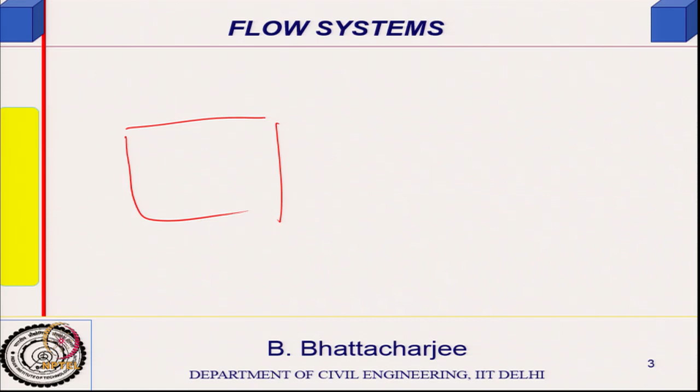As we have seen, if you recollect, I will just draw it again for you right now. We had some resource environment, then the service system, and then I have got the control environment, basically where I want to provide the service. Now, this has to be in a controlled manner.

For example, for air conditioning I have got temperature and relative humidity. Now, supposing it is in a tropical climate, and in summer I will be supplying cool air to the room, which will absorb the heat from the room and then exhaust out.

So, in such a situation this supply has to be controlled depending upon the situation here. I cannot go on just supplying and cooling it, because there is a range, a design range. So, I must get information from here and control this supply.

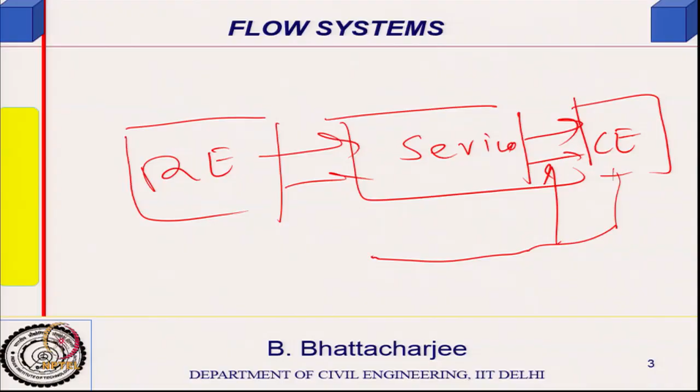So, the control system is required in order to ensure that my system is providing the controlled environment, the controlled condition as required, not more, not less. So, this is why we need a control system.

If we do not provide control, we might be wasting the resources. For example, air conditioning running needlessly. Now, my office room, let us say, I keep the air conditioning on because it is a small room, and in many places we have a manual off and on switch.

So, I just put it on, and one way is, if I feel very cold, put it off. That is also a kind of manual control by myself. I am feeling that it is too cold, so I do not need AC, put it off and so on, or else I can just leave it on all the time.

So, if you have a control, then resource wastage will be relatively less. AC will not be running needlessly, or sometimes it may not be meeting the requirement of the needs. Supposing capacity is there, but the AC is somewhere else, and I do not have a control, it does not see my condition.

I have a centralized AC, maybe it is catering to 3-4 rooms, and nobody comes and asks me. If it is a human being, then somebody can ask, are you comfortable? But if there is no human involvement, automatically it should sense the room temperature and relative humidity, and then put the supply on or off.

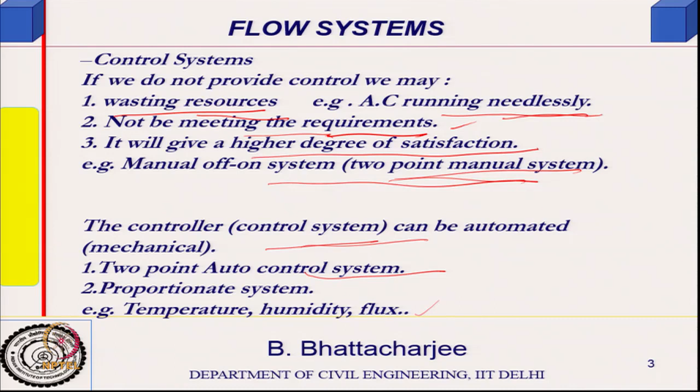If it is cooled too much, it senses the temperature, and then it will supply proportional to the temperature. You will see that, and there are temperature, etc. So, temperature, humidity, lux, many things it can control in that manner. So, essentially it would be something like this. Ideally, it should be something like this.

We have something called a desired value or design value, right. Something called a controlled variable. What is a controlled variable? Temperature or relative humidity or lux level. Temperature, relative humidity, lux level, or even it could be noise level for office-related privacy, because I do not want any noise to come into my place.

So, supposing I have sensing devices, there are systems maybe, or if not there would be possibly. So, whatever it is, everything. Fire, we have already talked about automatic detection and extinguishing systems, sprinkler systems which work automatically. So, when you put all of them in a building and make it work through a computerized system, that is an intelligent or smart building.

It has come long back, in the 90s; it is not today's, in the 90s it was there. The Japanese experimented on some buildings. In India too, there was talk of this; in the 80s and 90s people talked of this. India Habitat Center is supposed to be an intelligent building. I am not sure how intelligent it is at the moment over the years, but that you have to see, I am not very sure. Similarly, CMC building in Mumbai was supposed to be an intelligent building.

So, where the things should be sensed. So, ideally it should be like this. I have one variable, I call it the controlled variable, which is temperature, relative humidity, lux level, or whatever you want to control, temperature related to fire and so on. So, this is the control variable, internal temperature, one example, and it has got a design value or desired value.

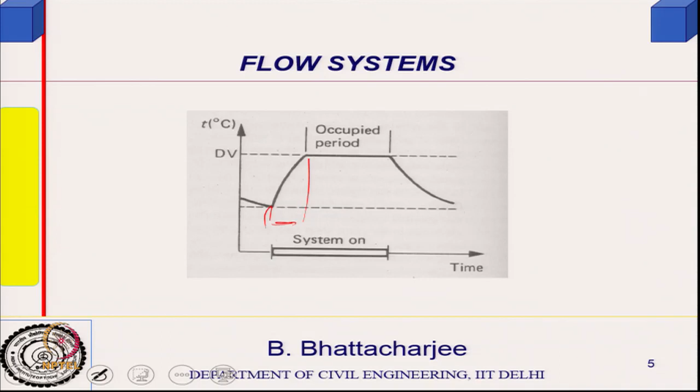So, the moment you put it on, it will not reach the desired value, right, and when you put it off, it will not come back to the same value. So, if somebody has to put in a centralized system, one will have to put it on somewhat earlier than this, and the system is on up to this time. Then once it has been put off, it would actually reduce down asymptotically towards the ambient situation. So, the system works for a longer period of time, and this is what we should understand.

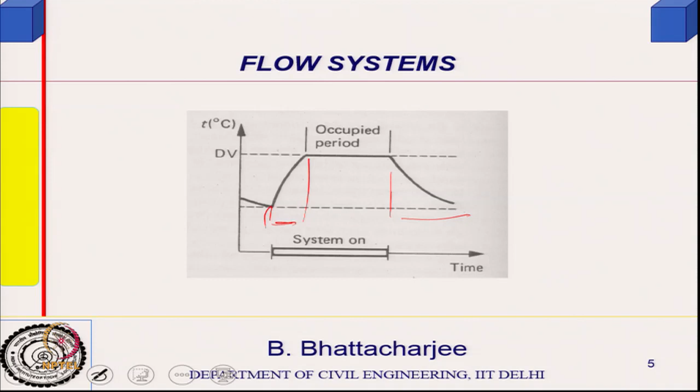Now, an essential component of such a control system will be first of all a feedback. So, you have the control environment, you must have some sensors there: control environment, sensors. We have seen that outside disturbances will come, for example, outside temperature changes, relative humidity changes and all that. So, these sensors will send the signal, and there will be some valves which will control the flow. The service system is here, then the flow goes accordingly.

So, it will not draw the resources as much if the temperature has already come down, or if it is heating and the temperature has already gone up, the full heater will not be operating. So, there may be multiple of them. So, the controller is the one which, through the sensors, gets to know what the temperature is here. The sensors could be whatever we have talked about earlier also.

For example, for temperature it could be a thermistor, or even a bimetallic strip thermometer; it has to be efficient depending upon what you are looking at, thermistor or thermocouples or whatever it is, some kind of temperature sensing device. It sends the signal to the controller; this is essentially an electrical signal. So, this controller will send a signal and close or open the valve depending upon the temperature sensed here.

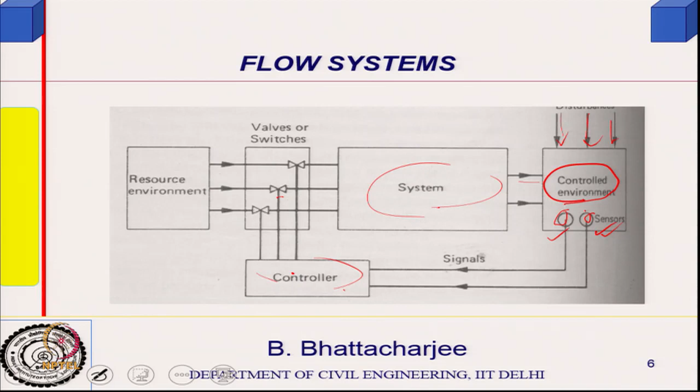Right. So, 2-point off-on control and proportional control. Let me go to 2-point off-on control first. There are some definitions. I said that there is a desired value, but you can't keep it exactly at that point. You will have some deviation on the plus side and some deviation on the minus side. This is called operating differential.

If you have a 2-point off-on control switch, it switches on here. The moment it switches on, it reverses the direction. For example, let us say the temperature is going downward. Say this is 22 degrees centigrade, and I am talking of the Indian scenario, and this is 28 degrees centigrade, because my desirable or design temperature is 25 degrees for my comfort requirement. Now, if I have a 2-point off-on control switch, what will happen?

It is now at 28 degrees centigrade. So, I should put on my system, then only cooling will be done. It starts cooling, going towards 25 degrees centigrade, but it will not stop, because you have to have an operating differential. You should not put off the system as soon as it reaches 25, because then it will start heating up again quickly. So, you have another 3 degrees: you decide it will start at 28 degrees and at 22 degrees it will put off.

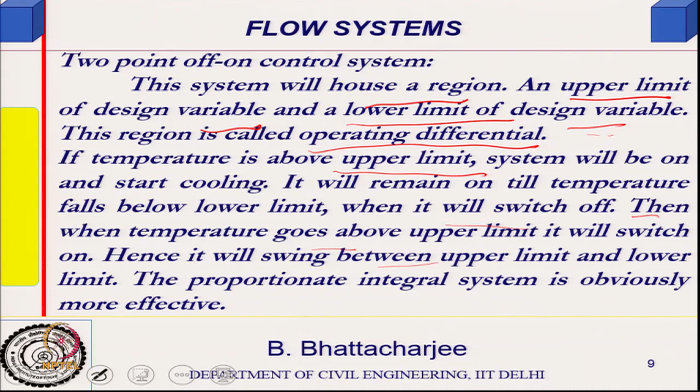Then you have got something called a proportional control system. So, a proportional control system looks like this. What it does is, this is my control variable, temperature here, temperature in differential, right. So, in case of a cooling system, as I gave the same example, this will be 28 degree centigrade and this will be 22 degree centigrade. In case of a heating system, it will be 17 to 23, right.

So, what will happen when it is 28 degree centigrade in a proportional control system? The valve will be 100% open. Now, here you are controlling not the off and on, but control is operating throughout the time, right. When it is at the highest temperature in a cooling system, it will open up the valve fully, 100%.

Now, the moment it comes to 50%, right, it will correspond to the mean value of 25 degree centigrade. And when it goes to the lower limit, 22 degree centigrade, supply will be 0, right. So, it is proportional; there it was 2-point, here it is proportional.

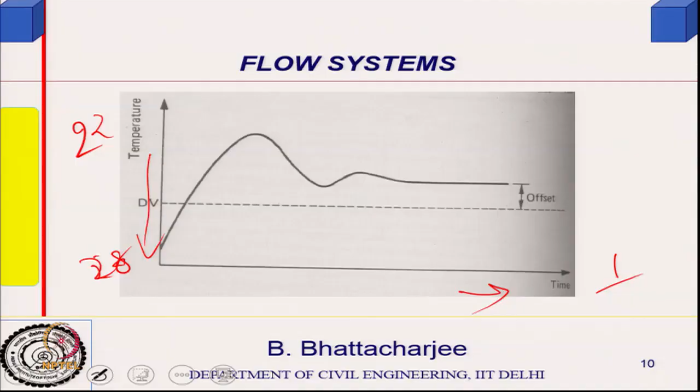So, what will happen? It is on all the time. The valve is at maximum value at 28, but supposing it is near 22, 23, still there will be some supply. How much will be the supply? Actually 1 degree out of 6, 100% for a 6 degree difference. For 1 degree, how much is the percentage?

100 by 6. So, when it is at 23 degrees centigrade, still 16% supply will be there. I mean, it will actually continue to supply 16%. Supposing it goes to the coolest point, 25 is my desirable value, and I said 22 is my limit after operating differential. So, when it is 22, it will make it 0, right, but immediately it will go, the system is getting perturbations from the outside temperature side.

The moment it goes to 23, it will supply something like 16%. I mean 1/6 supply will be there, because 6 degrees is 100%. So, 1 degree means 1/6 of the 100, which is something like 16 point something. So, the valve will operate at 16% supply. If it goes to 2 degrees, it will operate at 32% supply and so on.

So, this is never off. For a very short period it might be off. The moment it goes to 23, it will supply 16%, but then at 16% supply the rate of cooling will not be as much. So, it might go slightly higher, 23 and so on. So, its pattern of rise is something of this kind with time, but it tends to create an offset. You do not get it at 25, you tend to get it at maybe 23 or 24. So, you always get a temperature lower than the design value in case of cooling. In case of heating, it will be above the design value.

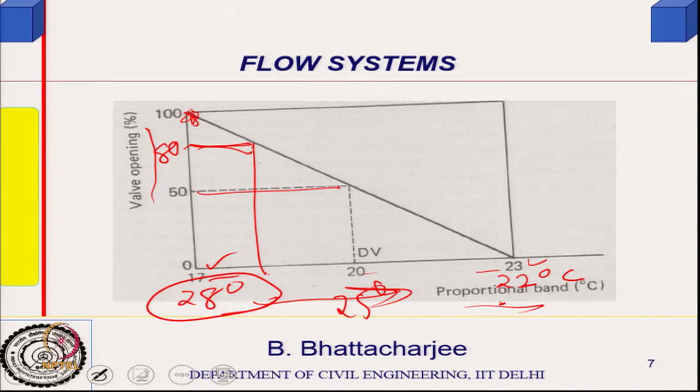So, supply is linear. Let us look back at this. This is linear with temperature, right. The supply is linear. So, let me redraw this here. See, this is linear actually. O is the output, and it varies from 100% to 0%. So, at E equals 0, there is a value of A, a value of output. It means your cool air supply, that is A, right.

Now, if E, the error, is plus, that means in case of cooling it is actually negative, in case of heating it could be positive; depending upon the sign, plus or minus, O will reduce accordingly. So, Kp is the slope of that line. For example, 100% over 6 degrees, for 1 degree it is 16 point something, I mean 100 divided by 6, because I said 22 to 28, the operating differential is 6 degrees.

So, Kp is nothing but the slope of that line, and E is the error. The value Kp is nothing but 100 divided by the operating differential, right. That is the amount of change in the output for unit change in error, for unit error, which could be positive or negative.

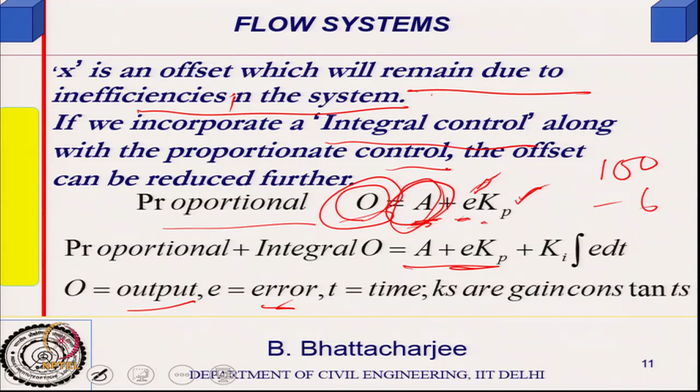So, what we do is we try to find out the E dt, the error over a period of time, right. Continuously you try to find out E dt, which is the area under this curve; you are trying to find out this area. So, this is the error, offset, integrating over the time, E dt. So, there is an offset.

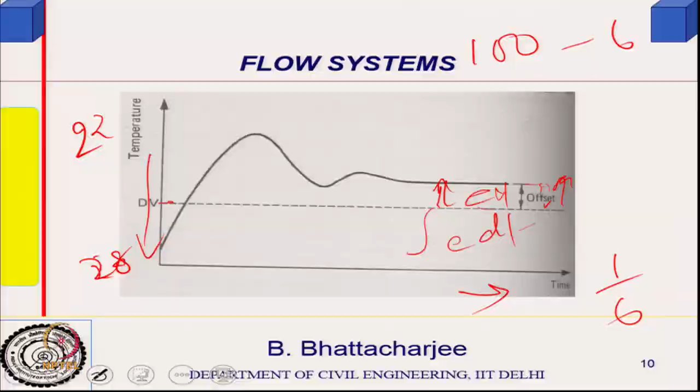Now, the offset might change. How will it change? The error might change, because if you have added an integral control system, it will try to reduce it down. So, what we are doing is we are integrating it. So, E dt is multiplied by a factor; E dt is the area under that curve. Ki is a constant, it will be multiplied.

Actually, it should be minus, this total thing should be minus, depending upon the sign of E, to bring the output as close as possible to the set point depending upon the offset. So, Ki is a constant for unit area under the curve; this should be the adjustment.

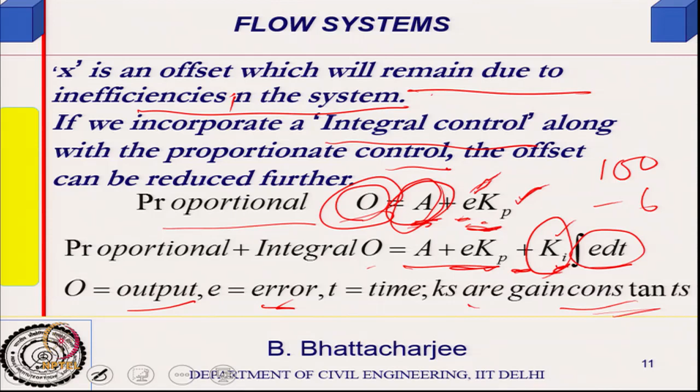Ki is the adjustment for unit area under the control variable and time curve. So, K's are called gain constants. Kp is a gain constant which is nothing but the slope of that line. Ki is another gain constant for integral control, right. P subscript for proportional control, I for integral control. So, that is what is done, and this is basically our understanding.

So, my point here is, if somebody is providing you a controller in a service system, you ask them what kind of controller it is. If it is computer controlled, that would obviously be far better, an intelligent system. The microprocessor, the computer would control it. So, controlling digitally is a much better system. You have a total control room where all variables are controlled together.

But now you understand that a proportional integral control system is better than simply proportional control, and far better than a 2-point on-off control switch. So, if you are installing something, this knowledge should be available to you. Lastly, the sensor locations.

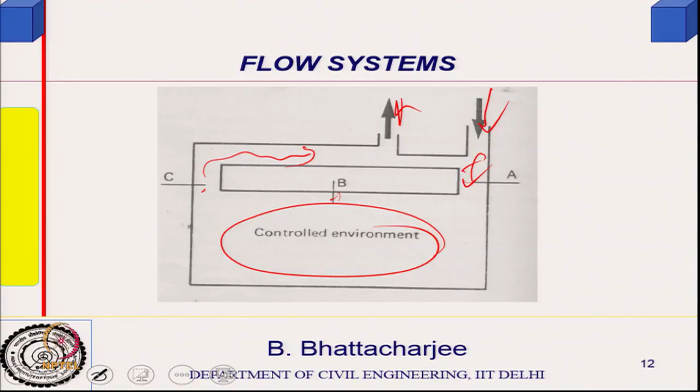Now, sensors should be located in such places: this is your inlet point, this is your outlet point, this is your controlled environment. You should have sufficient sensors. So, typically A, B, C are the sensor locations. At the entry point you have something, near the exit line you should have a sensing device, and somewhere in between you might have a sensing device as well, right. So, that is what it is.

So, this is the general discussion on control systems. We will devote one lecture to intelligent buildings sometime later on, and you can understand that your initial investment may be somewhat higher, particularly in a functional building, because the cost of controls is very much there.

But if it is a large functional building, it may be worthwhile, because it would actually give you better comfort and also reduction in cost. For example, energy cost, right. In an air conditioning system, energy wastage would not be there. So, that is about the control system and general discussion on services.